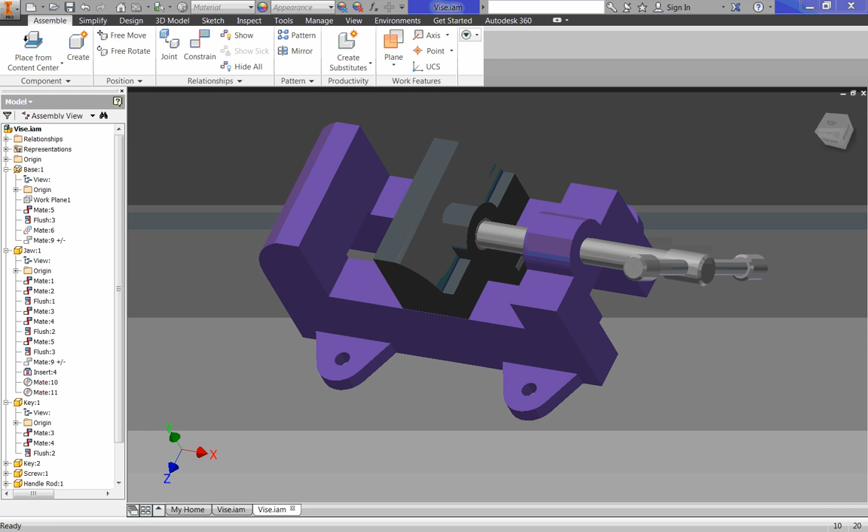Alright, now that we have our keys correctly done, we're going to move on to making it so that this screw can actually fit through this hole. This is going to make a lot of changes from what we originally had. So to do that, we're going to have the screw come all the way through to this side of our jaw.

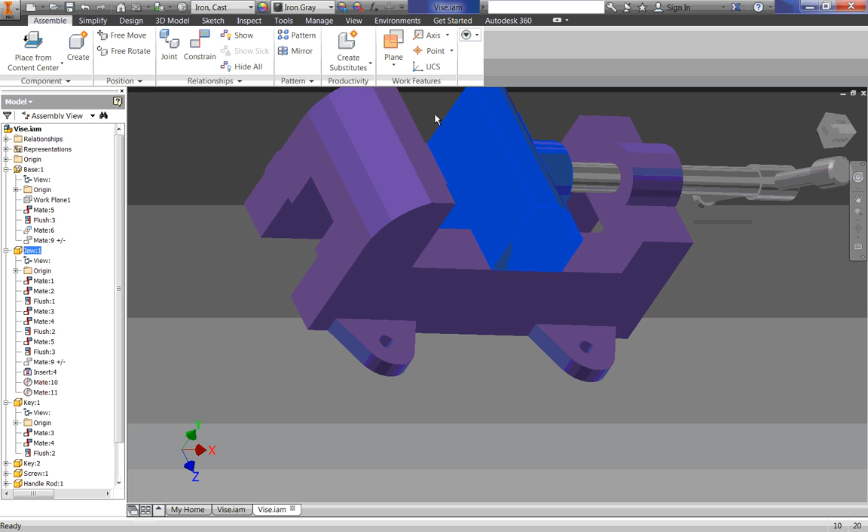And then on that side of the jaw, we're going to have to make it so that the screw can't come back through the hole, but also can't go forward through the hole. So we have a couple different steps here. First off, we need to edit our jaw so that we have a hole coming through, and we're going to also place 2 screw holes there, which you'll see in a little while.

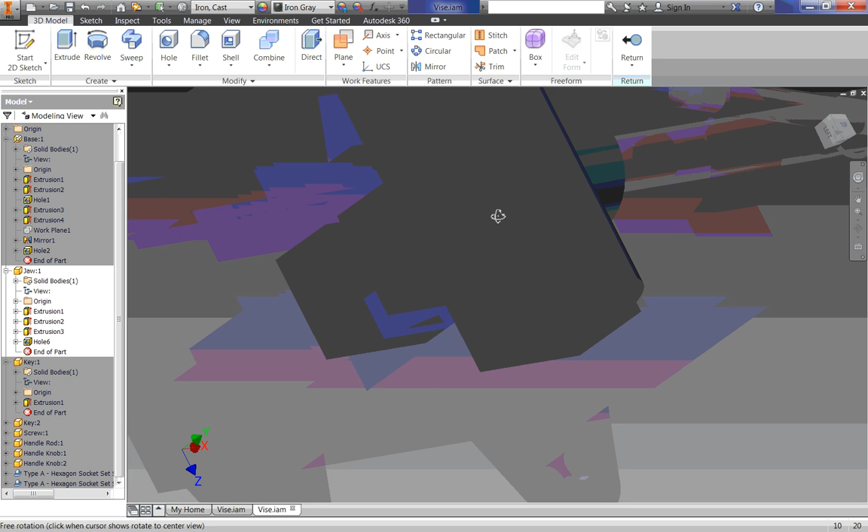So I'm going to double click on my jaw to edit it. And first thing I'm going to do is just delete this hole. I no longer want it. So I'm going to find it in my browser, hole 5, right click, click delete, and there it is. It's gone now. Now we need to place a hole on this side, so we're going to click on hole, click on this side, and I want to center it on the same axis again, so I can just come back here and click on the outline of the circle to center it.

Now, on this side of the screw, we're going to have a special kind of thing called a retaining ring that'll hold the screw in there. So we need to give it room to sit in there. So to do that, we're going to have a counter bored hole. It's essentially a large hole on top of a smaller hole. Now my distance is going to be through all because I want to cut through everything.

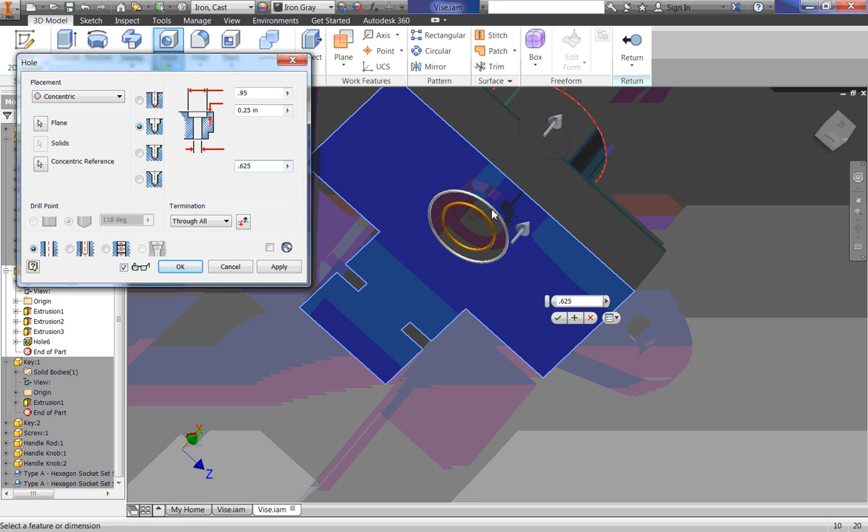We already know the smaller diameter's hole is 0.625. We're going to do a larger diameter of 0.95. And then the depth of 0.25 is perfectly fine. We can just leave that there. So I have a large hole that has a diameter of 0.95 and has a depth of 0.25. And then in the middle of that, I have a smaller hole with a diameter, actually that's supposed to be 0.625, going all the way through it, just as we see here. So I'm going to click OK, and there's my hole.

Now we need to put some screw holes on there, and if we look at my vise with all the changes made to it, that's going to be what mounts these little plates on it. So if I hide these, you can see those screws go into holes right there. So we're going to then go ahead and add those. So I'm going to create a sketch on this surface.

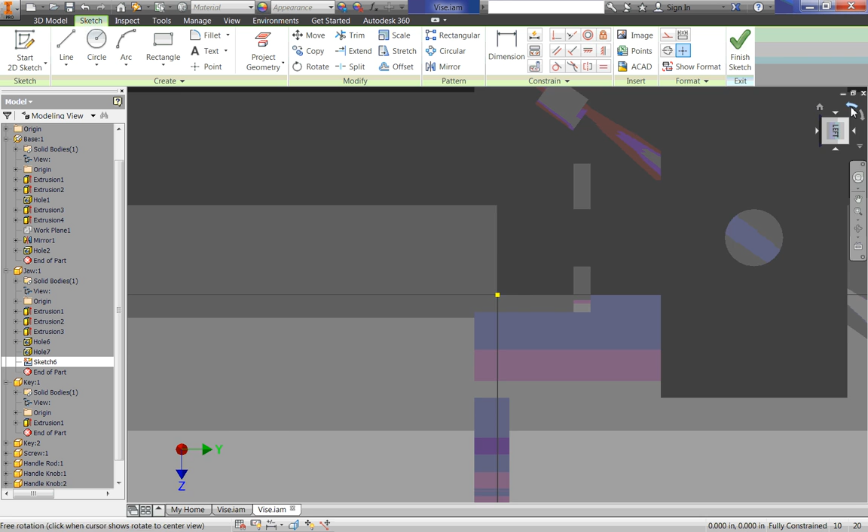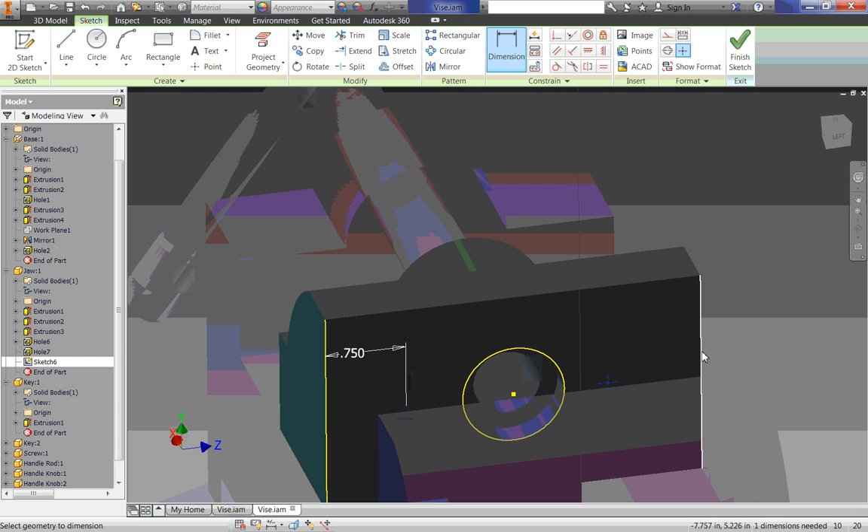And I'm going to just put 2 points there. Doesn't really matter where. And I want to make them in the same plane as the center of the circle. So I'm going to go up here and click Project Geometry, and click on that outer circle to get that center point. Then I could just use a horizontal constraint and make them both horizontal to that point. Then I'm going to do a dimension from the point to the edges, and I'm going to make this 0.75 inches. There we go.

So I'm going to click H on my keyboard to get to the hole tool. I no longer want a counter bore hole. I want this to just be a regular tapped hole. So I'm going to change my distance and then go down here and click my tapped hole. Now earlier we had a full depth tapped hole. We're not going to have that anymore. That's a much more complex thing to do in manufacturing. So typically we have a longer hole that isn't tapped than the regular depth of the hole.

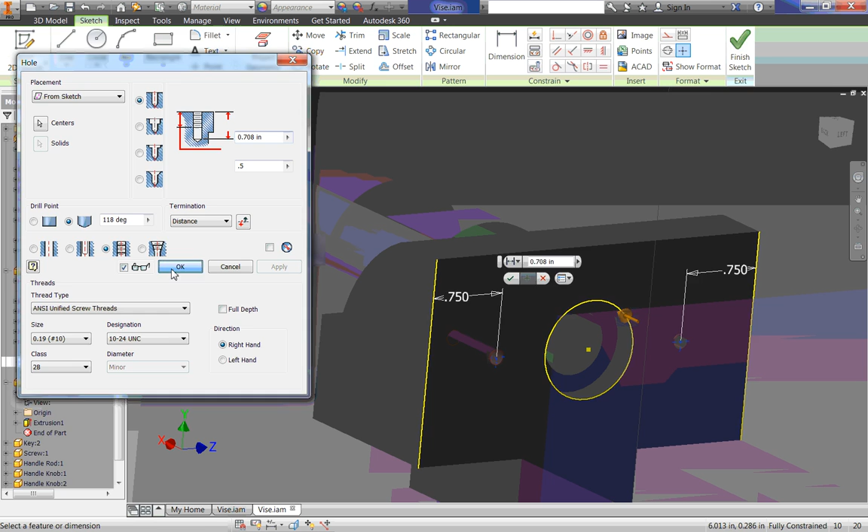Now we're going to change our size. We're going to just use a number 10 screw here. It's a fairly small yet strong enough screw for what we need. And we want our thread distance to be 0.5 inches, which will automatically set a good amount of hole distance past that. So I can click OK, and there are my holes. And if we look really carefully, we can even see the thread stops at some point, and there's the rest of the hole. Okay, so this is all we need to do to this part. So I'm going to click Return.

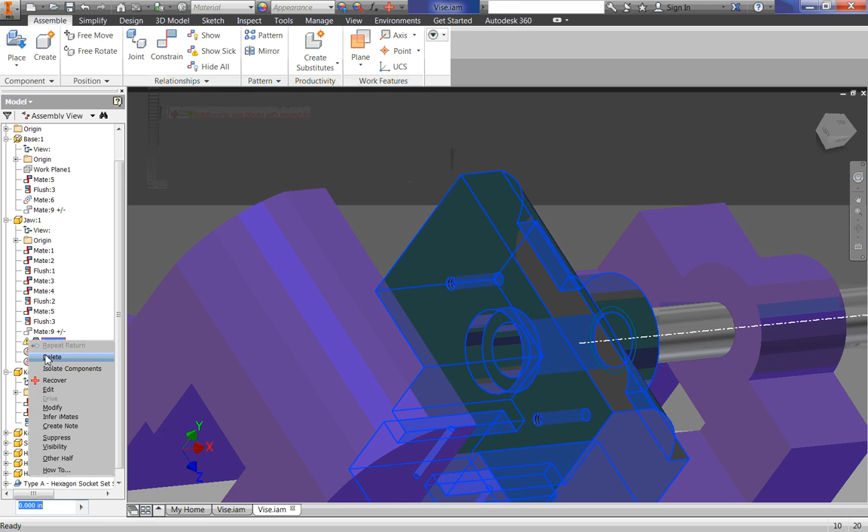And we have this error because that constraint we had with the screw going into the jaw no longer exists. So I'm going to just click accept and then find it. It's the one with a little error message, and I'm going to right click on it and delete it. We don't need it anymore.

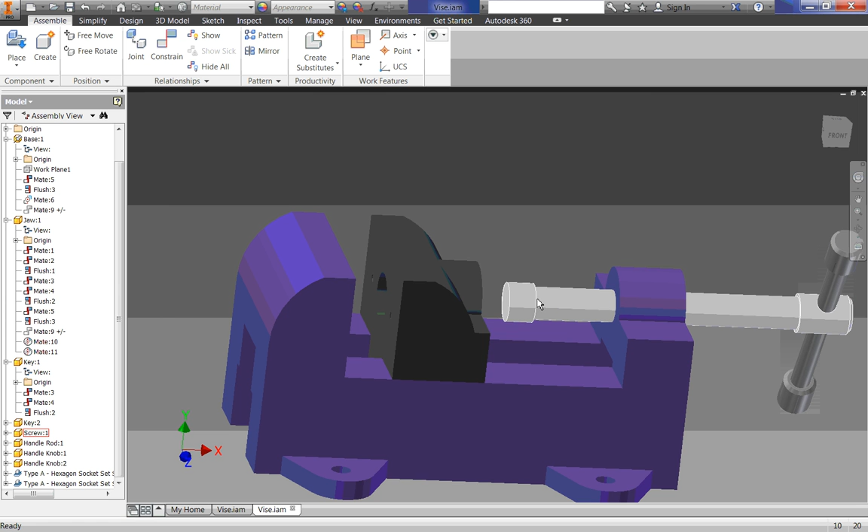Alright, so now we need to make our screw so that it fits all the way through that hole to our side. And to do that, I'm going to need to add some distance onto it. So I'm going to measure by clicking M on my keyboard to get to the measure tool. And I just want to measure from here to here, figure out how much longer I need to extend my screw. So I need my screw to be 1.75 inches longer from this inner part here.

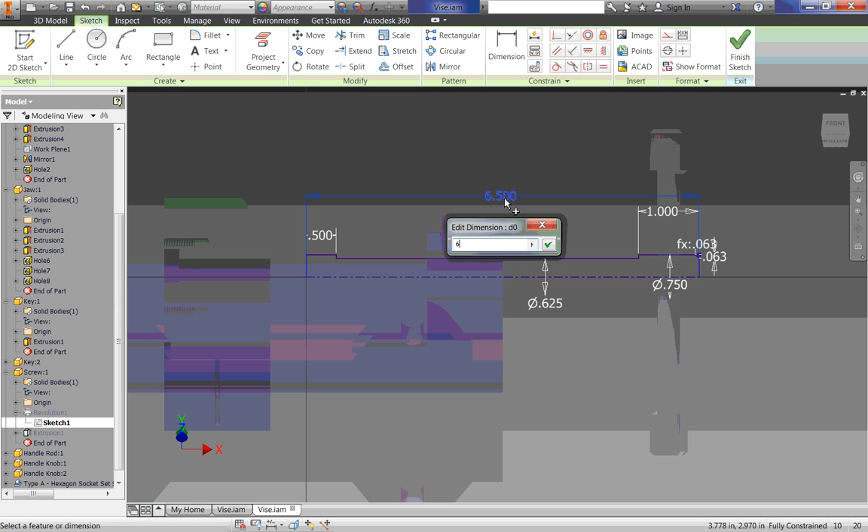So I'm going to double click on my screw to edit it. And I'm going to go edit that revolution by clicking the plus next to revolution and double clicking on the sketch. So first thing I'm going to do before I forget is extend that distance by 1.75. Now this 0.5 here we're going to get rid of later, but I only really want my screw part to be 1.75 longer, so I need to subtract it from that 0.5 there. So this will be 6.5 plus 1.25 inches will give me my total distance that I need.

Now I'm going to go ahead and delete this 0.5. I'm going to zoom in and delete these lines here. I don't need them anymore. Now I can't select this line because it's only letting me select the dimension line, but I need to delete that line. So I'm going to right click and go down here and click select other. And that allows me to select anything that I'm near. And I want to select the curve, which is really just a straight line, and delete that by pressing delete on my keyboard.

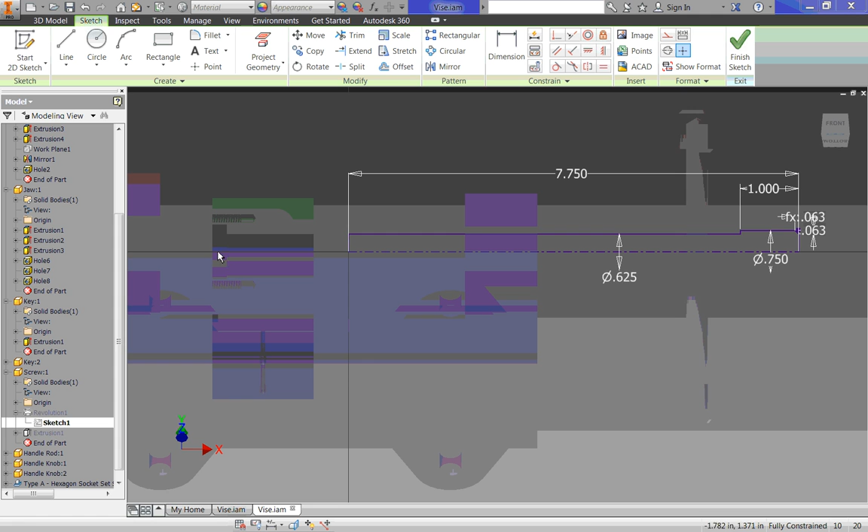Now I can just drag this line forward, and it can go further than it needs to go. It doesn't really matter. And then I draw a line from my origin up until I intersect. And then I'm going to just go to trim and trim away that line. And now we just have a straight flat area. Now, we're not done though, because we're going to use something called a retaining ring to go and lock that shaft in there.

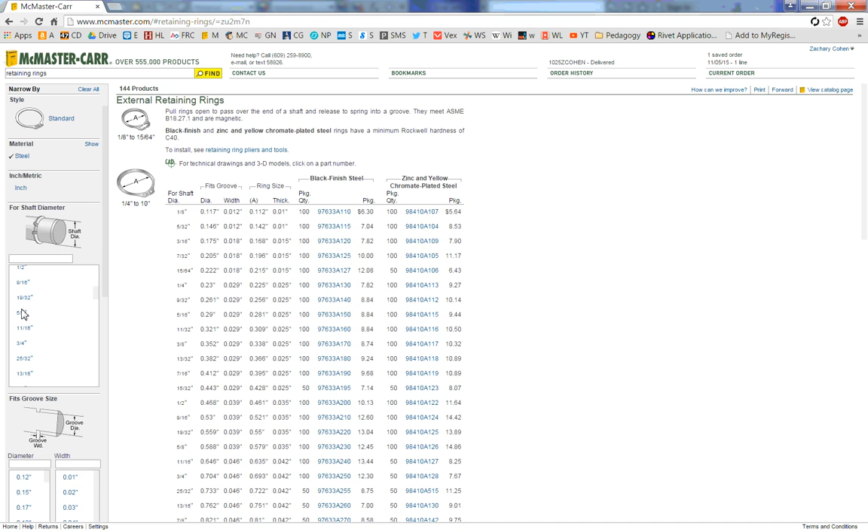So if I go to McMaster, I have an option here called retaining rings. And there's all kinds of different options, and we're going to go with an external retaining ring here. Now, I can narrow down what I need, so I don't need it in stainless steel, so I can select steel. And then we know our shaft diameter is 5/8 of an inch. So I select 5/8 of an inch. And it gives me two options, black finished or zinc and yellow chromate. We're going to just go with black finished. And if I click on that, not only can I buy it, but I can click on product detail. And it'll give me this whole CAD and drawing of everything I need to know about it.

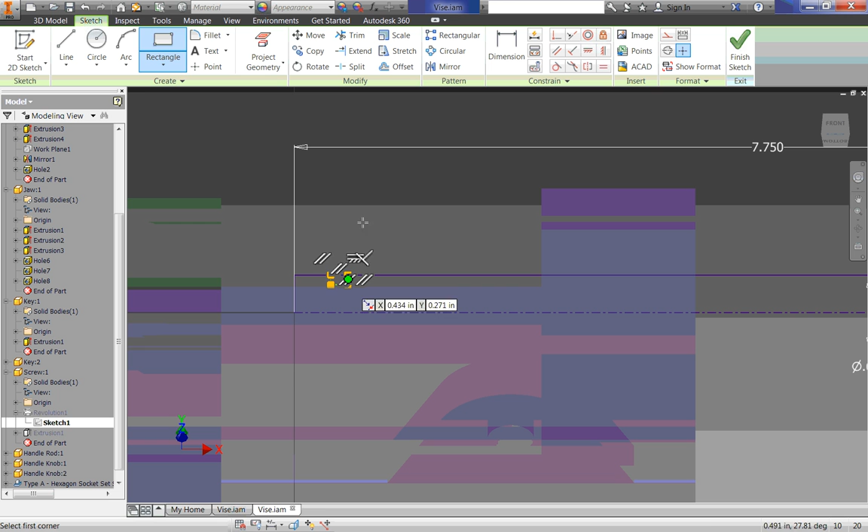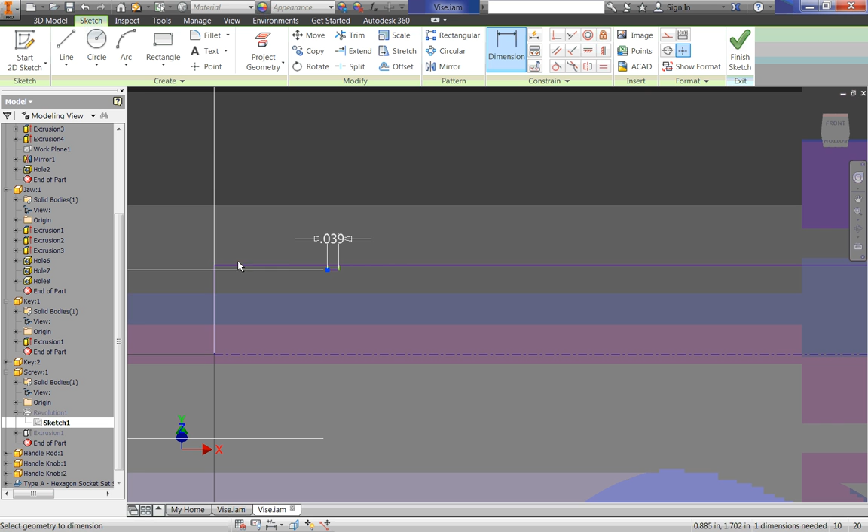So to do that, I'm going to just draw a rectangle, doesn't really matter where, and then go ahead and dimension it. So we saw the diameter of it was 0.588, it's a pretty small groove, and then the width of it was 0.039 inches. And it still has a green line because I can still make it move back and forth. I'm going to place it 0.125 inches away from the front. So now I have a box that we can cut out to create our groove. So I'm going to finish sketch.

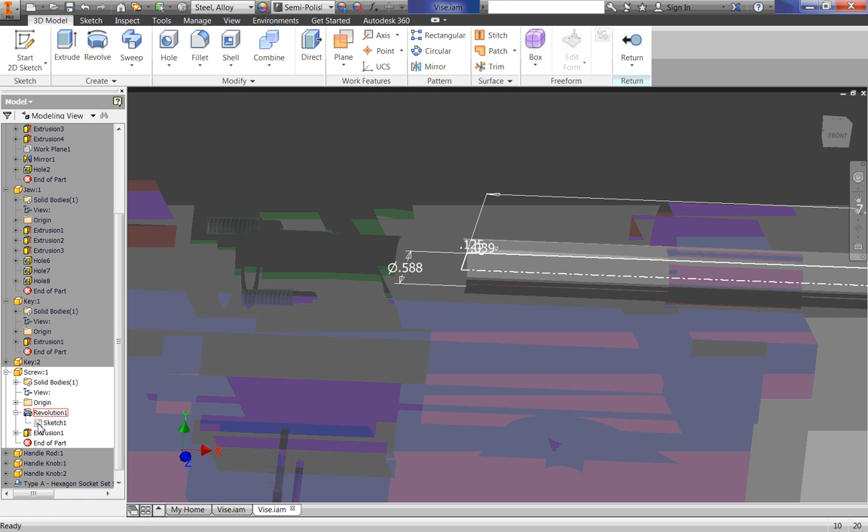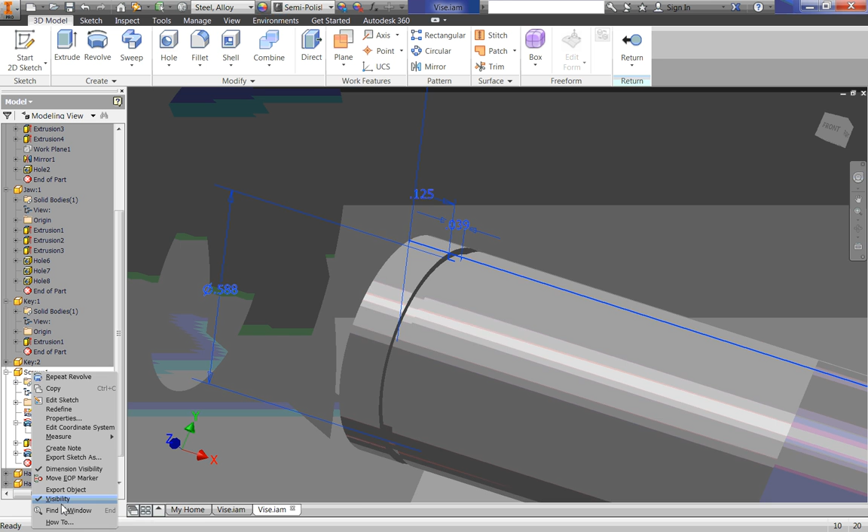Now that groove doesn't show up because I need to revolve it. And the easiest way to do that, I could add to this revolution, or I could just make another revolution. So I need to first see this sketch, so I'm going to right click on the sketch and click show sketch. And then I go to revolve, and I can select that box that I want to cut away. So I click cut in my options, and then I need to pick the center axis. Click OK, and there's our cutout. Then I'm going to just right click on the sketch again and uncheck visibility so that we no longer see it. And there we have our groove.

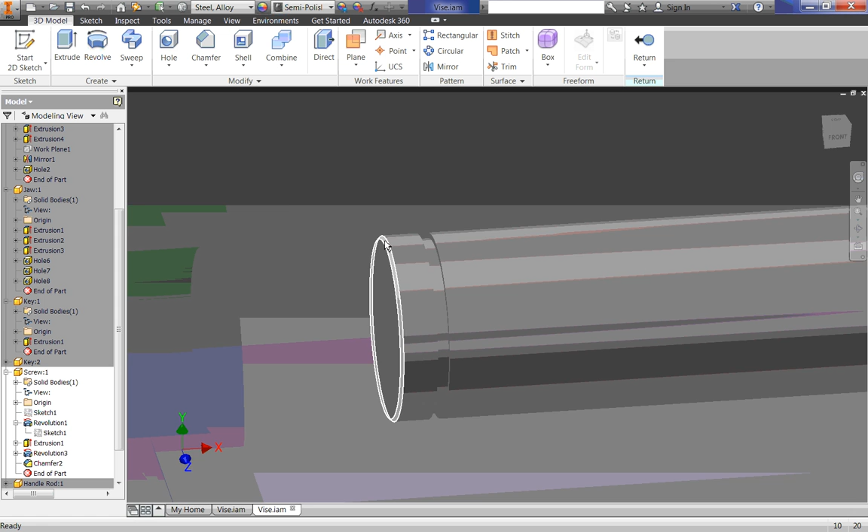Last thing I want to do to this is I want to chamfer it. So it's a sharp edge right now. And I want the distance to be 0.05 inches, or sorry, 0.01 inches. It's a fairly small chamfer. It's really just a safety feature, so we don't have a sharp edge there to cut someone. So I click return, and now I have a chamfered edge on there.

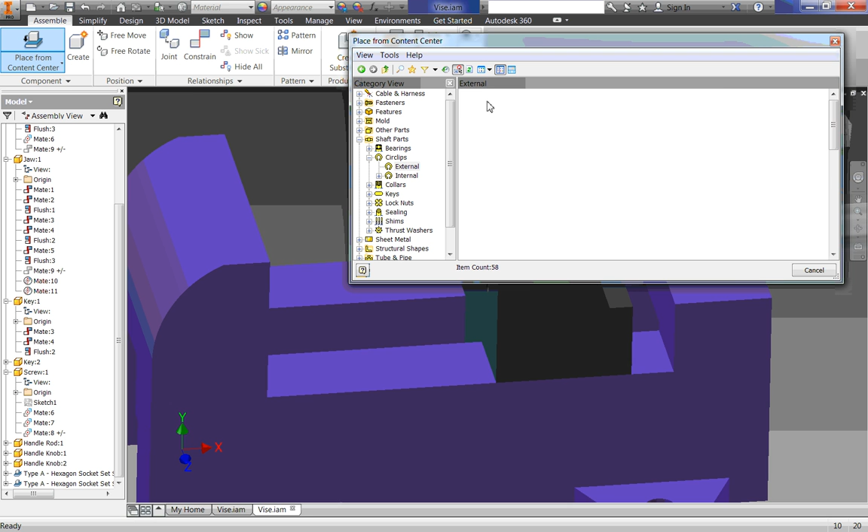So I need to place that retaining ring, and just like we did the set screws earlier, I can place that from the Content Center and have Inventor create it for me. So that's under shaft parts. I have all these different options, including a circlip, which is also a retaining ring. I want an external one. And this very first one is exactly what we need, an ANSI B 27.7M. So double click on it.

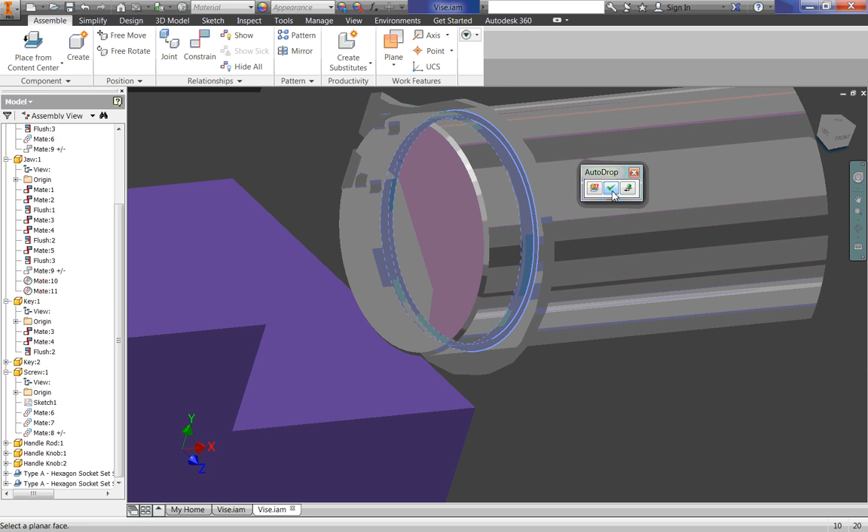And I'm first going to select the cylinder, so that little groove that we drew. And then I'm going to select the back edge to place it on, and click the little check mark, and there's a retaining ring. Now I don't need to place another one, so I'm going to just press escape on my keyboard, and we have a retaining ring in there then.

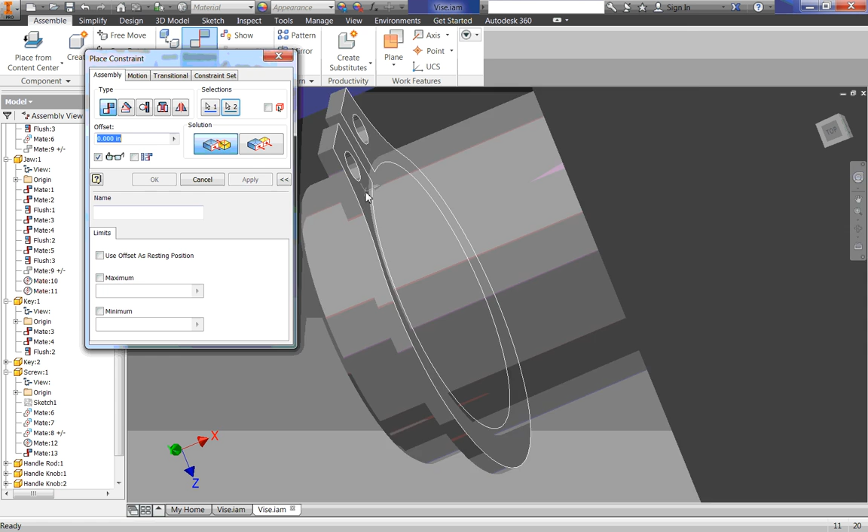Now this retaining ring will sit flush back against this wall, so I'm then going to constrain that. So I'm going to go to constrain, go from that wall to this side of the retaining ring. And it's just going to sit in there freely.

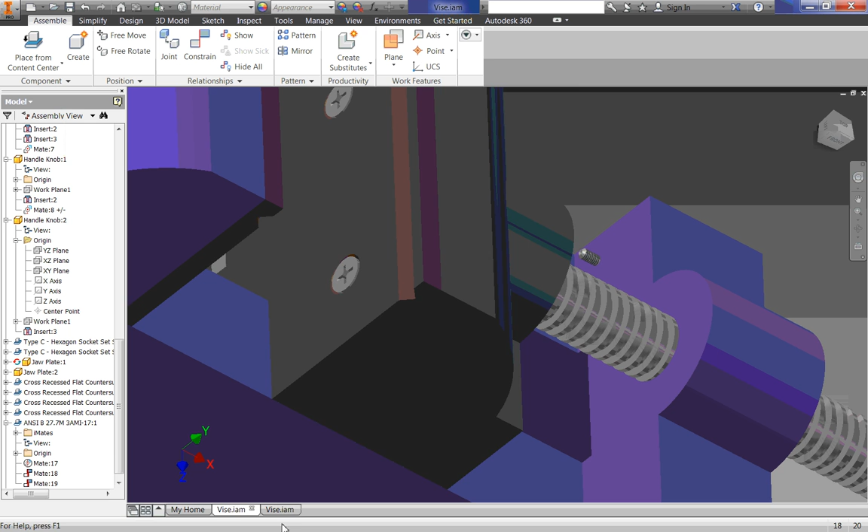So now, when my screw pulls back, it'll pull my jaw with it, but I still have nothing to keep my screw from just going forward if I were to make this in real life. And that's what these holes are going to be for. Remember, we have these little plates. Not only are they sacrificial in that I can drill in them and it won't really matter if I damage them, but also they're going to be the wall that keeps it so that when I push forward, it'll also push the jaw forward as well. So that means I need to create a new part.

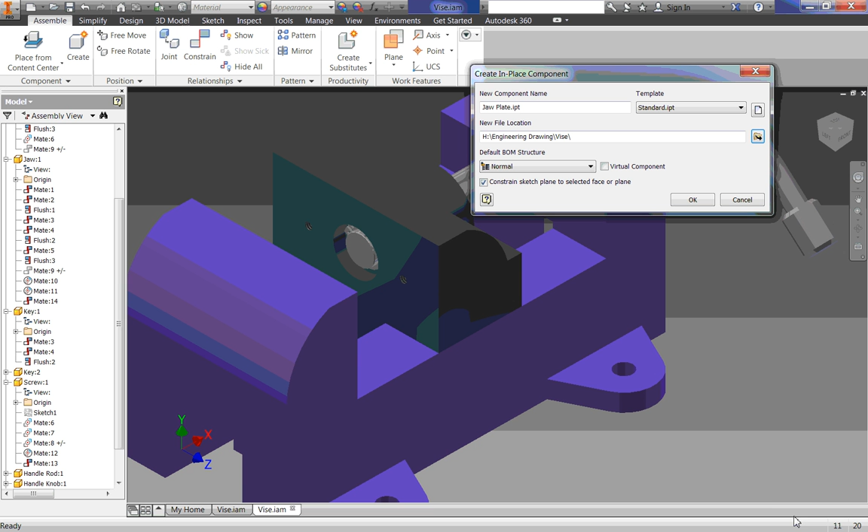And one of the cool things about assemblies is I can create the part within the assembly mode. So if I go up here and click create, it allows me to name the part. So this is going to be, what did I name it earlier? We'll just name it jaw plate. And I need to select a location to save it in. So that's going to be in our H drives, our engineering drawing folder, our Vise folder. Right here is perfectly fine. And click OK. And now I have a part created.

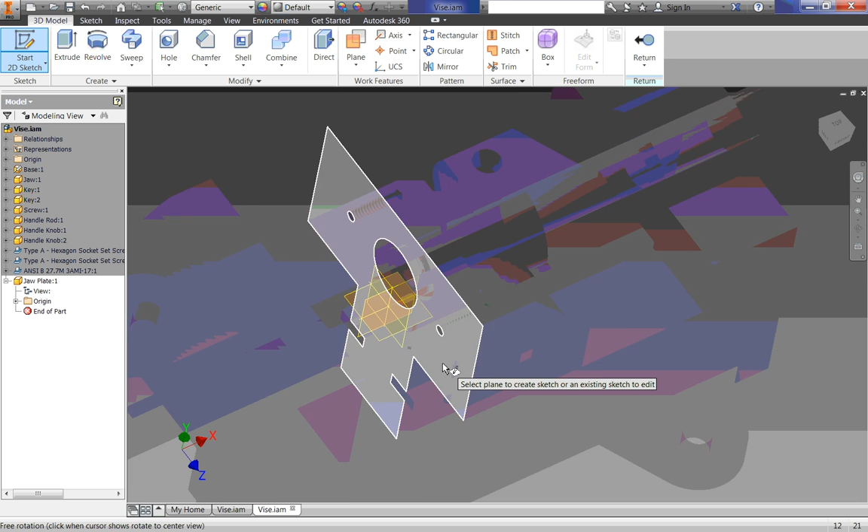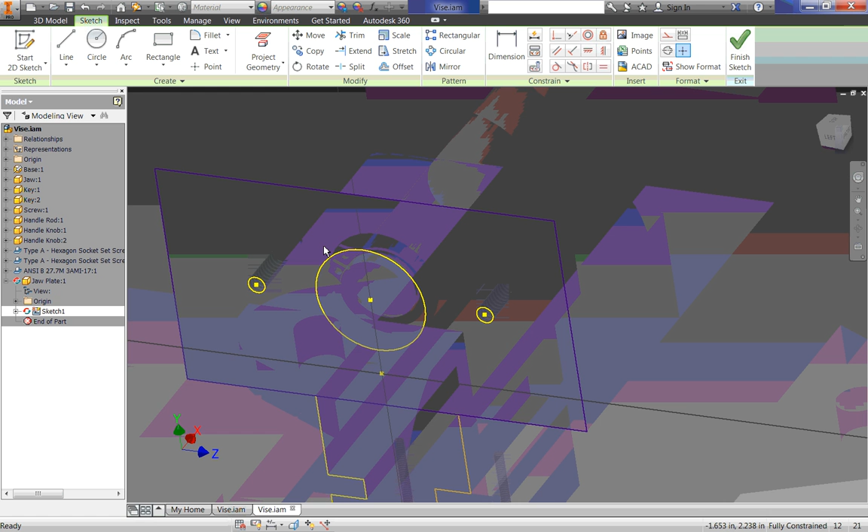So I need to select what surface I want to start that part on. I'm going to start on this face here. And we can start drawing a sketch. So I'm going to go to Start 2D Sketch. And we want to start on our front plane, our XY plane here. Now I'm essentially just going to make a square from here to the other side of the jaw. So to do that, I'm going to project the geometry of the jaw. So there we have our square essentially. Then I can use the rectangle tool to make it. And there we go. That's all I need so far.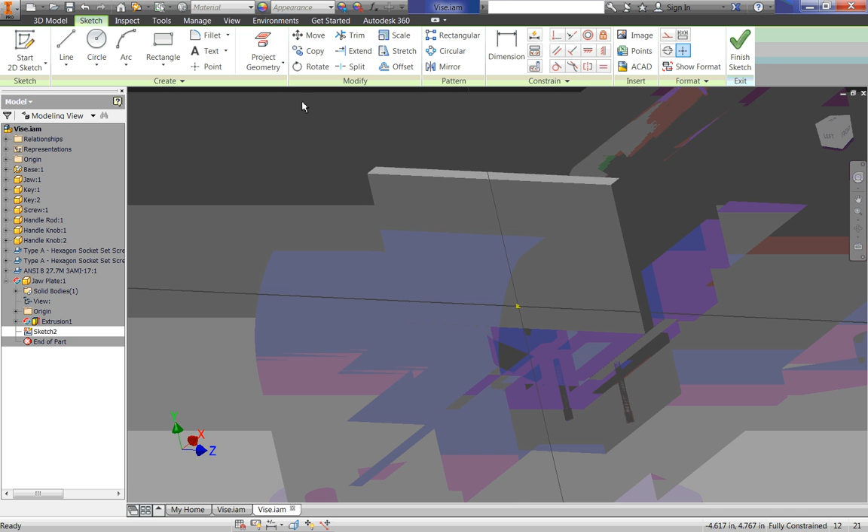So I'm going to extrude that out. And I want to extrude every part of it, so I'm going to select the circles too. And I'm going to change my distance to be 0.2 inches then. Then we just have to add those holes for the bolts here. So I'm going to create a new sketch on that front surface. And I need to then, again, project the geometry of that back surface. The easy way to select it is select the lower part of it down here. Oh, there we go. And now I have the holes where I can make my points.

So I'm going to go to Hole Tool. And this is going to be a little different. We want these screws to sit totally flush with these jaw plates. So I'm going to select a countersunk hole, which has a little V cut out of it. And then also, we don't want these things to be threaded. We actually want what's called a clearance hole. And that allows the bolt to easily go through it. So I'm going to select clearance hole.

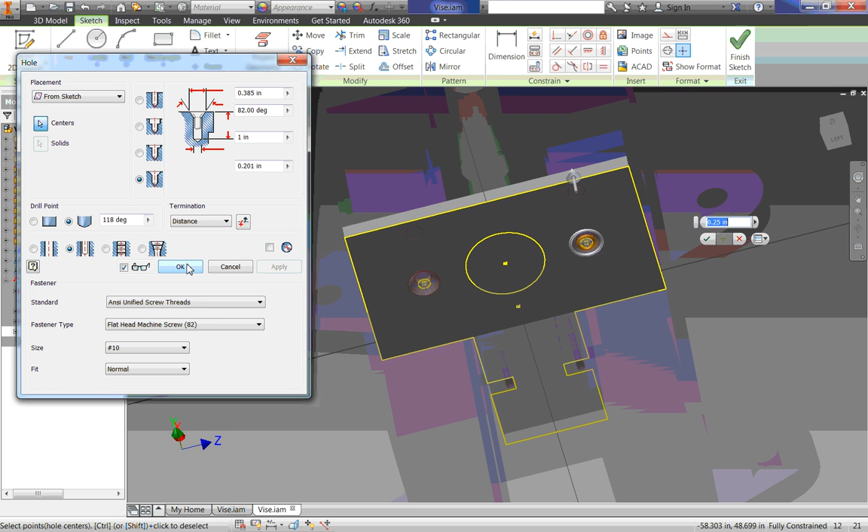And then I'm going to go down here to size. And we earlier selected the number 10 thread. So I'm going to select the number 10. And that automatically makes every distance up here what we want it to be. So a number 10 thread or bolt uses a .201 diameter clearance hole. It doesn't really matter how deep it is because we're just going to 0.2 inches thick. And then these two things are automatically set for number 10 as well, so that's exactly what I need. So I just click OK, and there are my holes. Easy enough.

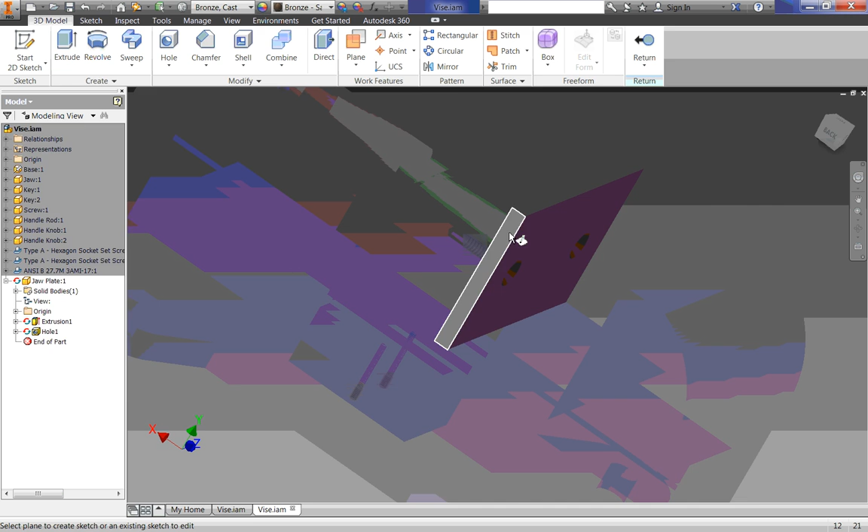Let's change our material. These are often made in bronze. It's a soft material that won't damage something else. And then the last thing I want to do to this is, if you look at this version, I have a little V cut out here, and that's so that we can clamp pieces of metal in it. So I'm going to create a sketch on the side, and I'm going to project that geometry so I can see exactly what I'm doing. So I have a yellow line outlining everything. I'm going to just draw the little V shape then.

I want to make sure these lines are perpendicular to each other. So I'm going to come up to my constraints, select a perpendicular constraint, and go from one to the other. Apparently I already made them perpendicular when I drew them, so that's good. So then we can go ahead and dimension them. I want from one end to the other to be 0.2 inches.

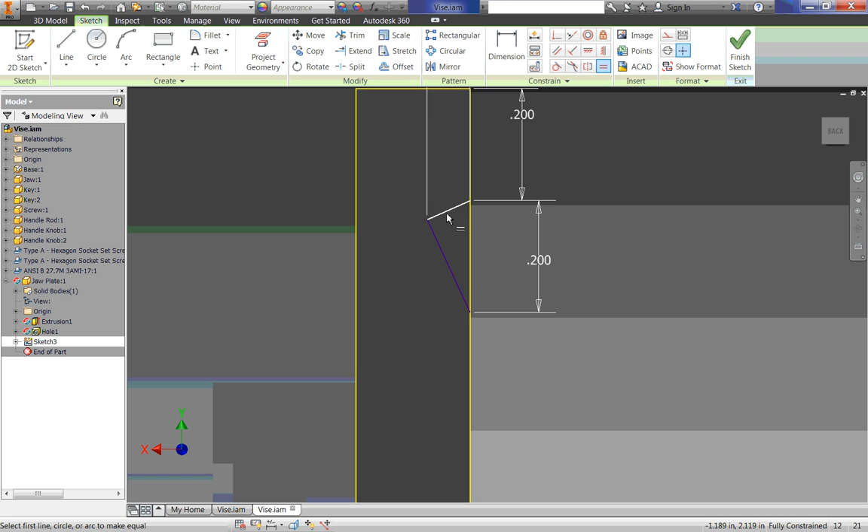From the top to the bottom, or from the very top, I want it to also be 0.2 inches. And then I want it to be 0.075 inches deep. Now we can see the lines got screwed up here. I can fix that by just making them parallel to each other, or equal to each other, and that didn't work. So let's figure out why.

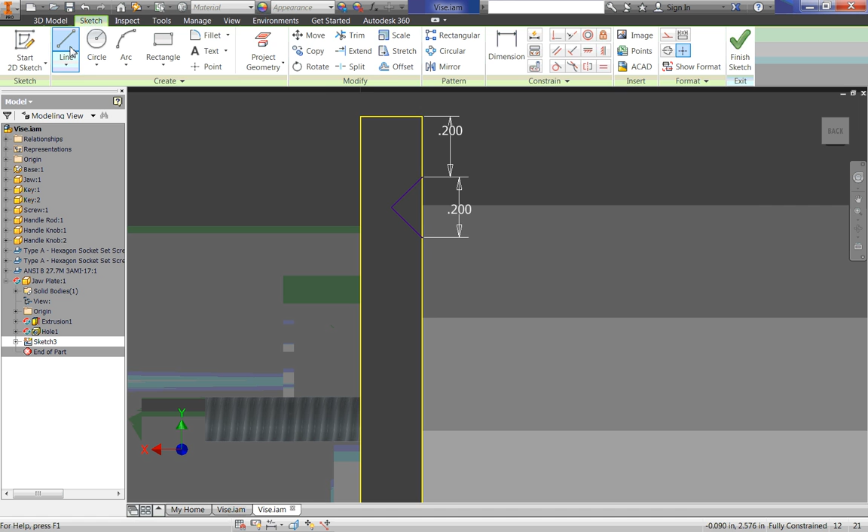We're trying to make them equal first. There we go. Oh, and if these are 90 degrees, I won't be able to set a depth just due to math. If this is 0.2 inches and this is exactly 90 degrees, it'll essentially use trig to find that line there. And that's all we need.

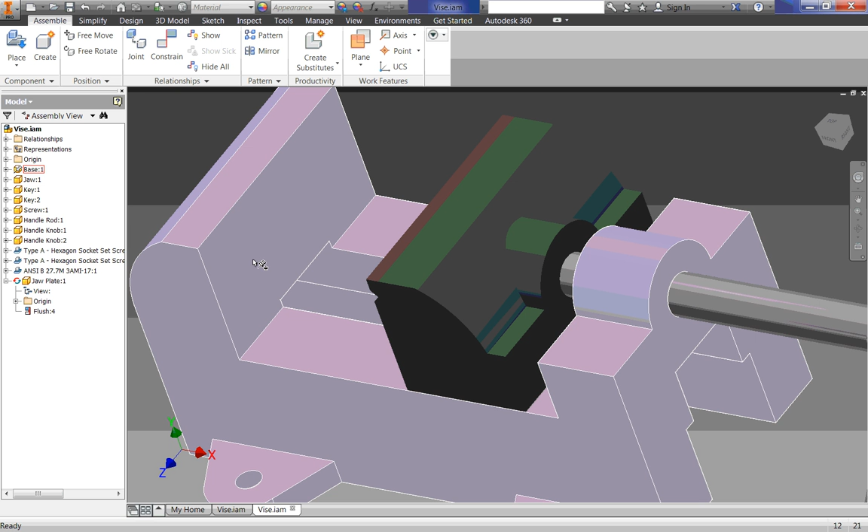So let's extrude that then. I'm going to just select that and go to cut, and I want my distance to be all. And there we go, it cuts it all the way through. So let's click return. And you can see that part is now made there.

Now we need to place another one on this side. And to do that, I first have to place those holes that we did earlier on our jaw. So I'm going to double click on my base, and I'm going to create a sketch on that surface.

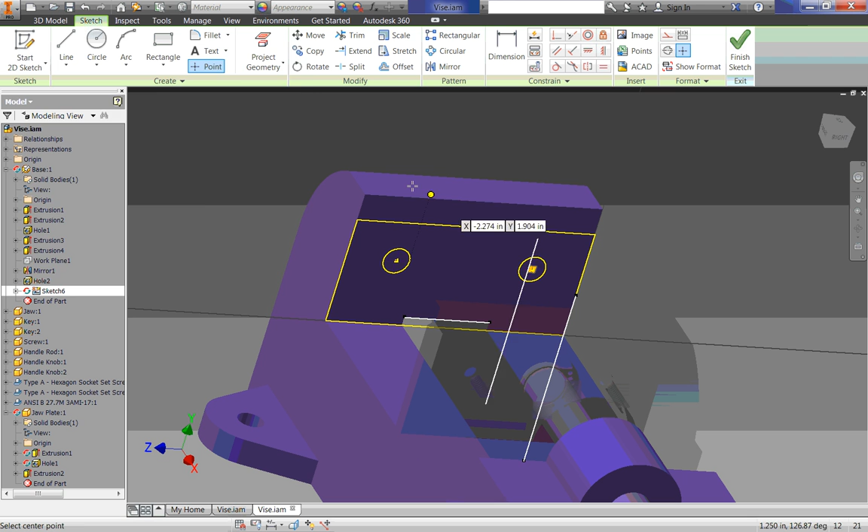Now I want to make sure those holes line up exactly with this side. So I'm just going to go ahead and use my project tool and project those points to it. Select point tool and select the center points. And now I can click on the hole tool and do 2 number 10 holes

that are 0.5 inches deep for the thread. And that's all I need to do. So I click OK, and there's those holes. So we click return, and then I need to place another jaw plate.

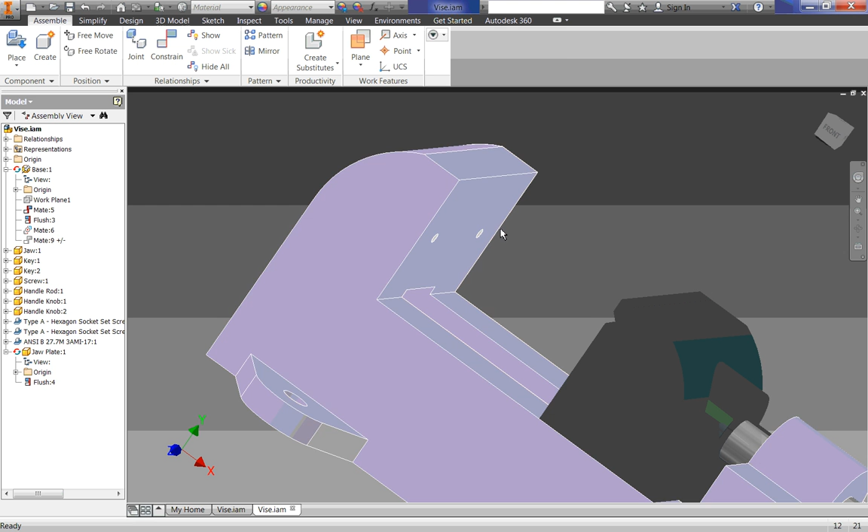Because we made it, I can click on place up here. And let's go back. Oh, and before we can actually place it, I need to just save my parts, and I'll save my jaw plate. So this menu that comes up essentially is saying, do you want to save these files that were changed?

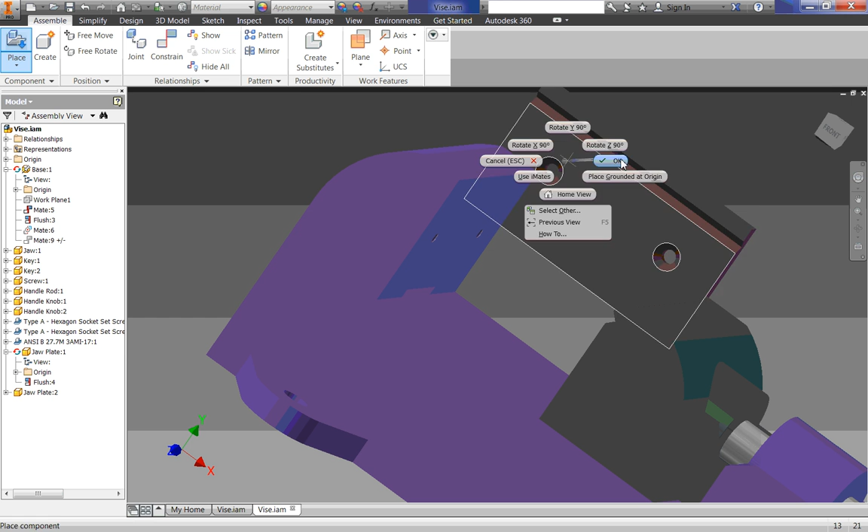And initial save means I'm creating the jaw plate to begin with, so I'm going to click OK. That'll save all of them and create the jaw plate file. Then I can click place, and there's my jaw plate. So I'm going to place one, click OK, and then let's go ahead and constrain it.

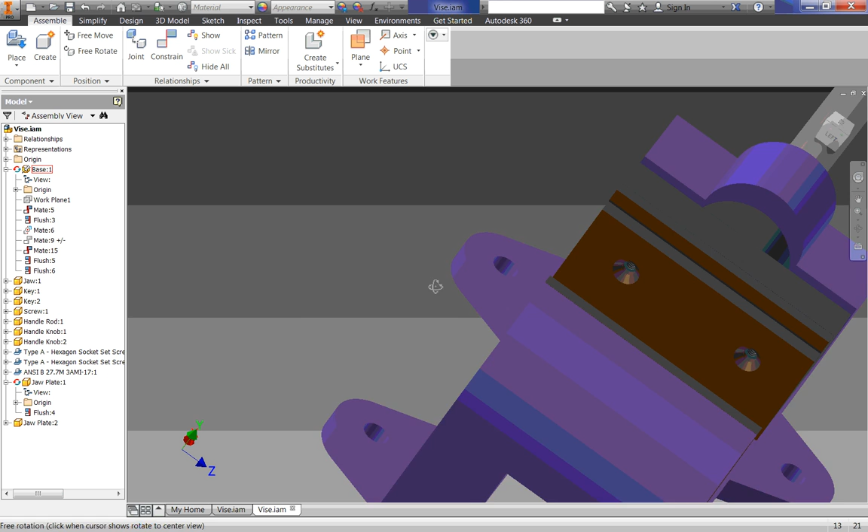So I'm doing this part quickly because by now you should be able to make these simple constraints so that that locks in there.

So now, once we place the hardware in there, when I move this, the screw will either butt up against my jaw plate and make it move forward, or pull up against the retaining ring and make it pull backwards.

So let's go ahead and place those screws. And again, I'm going to have Inventor do it for me by clicking on place and clicking place from Content Center. We're going to go back to fasteners, and this would be in a bolt. And I want a countersunk bolt, and it gives me a ton of options. I'm going to scroll down

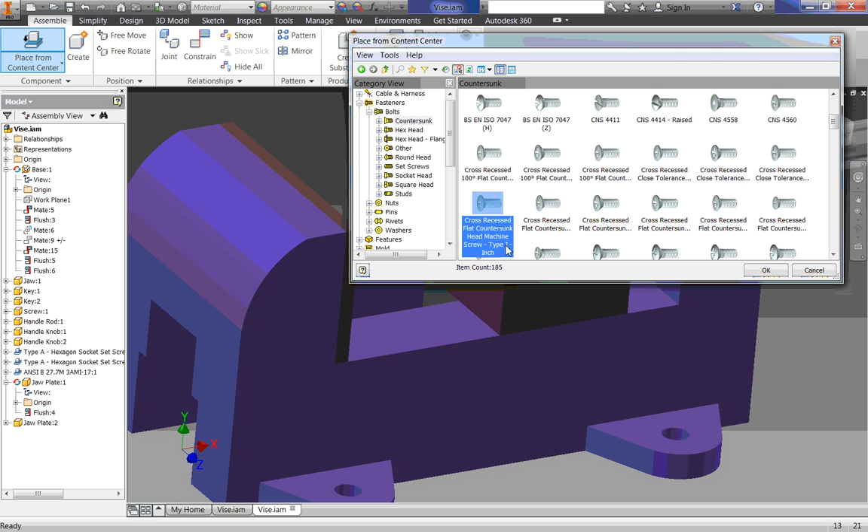and select a, where is it? A cross-recessed flat countersunk head machine screw, Type I - Inch. So double click on it, and it's now going to ask me to select a hollow cone to place it in.

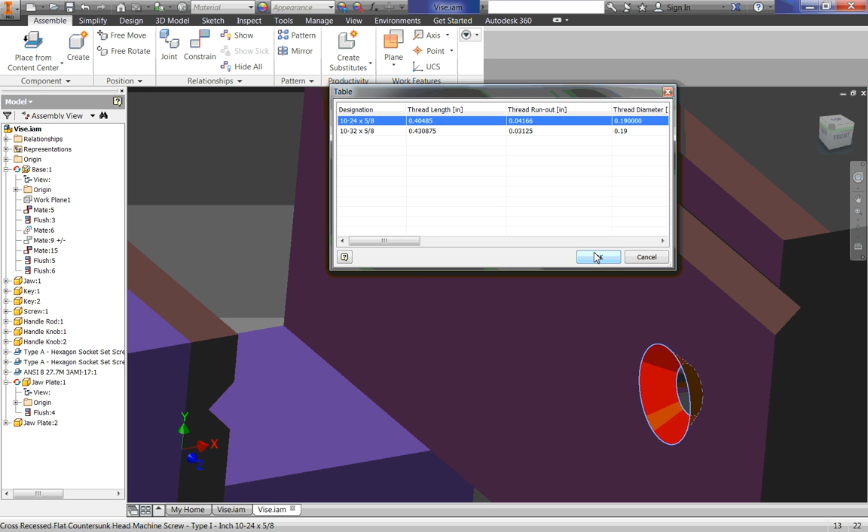And then we can change the length of it. We want it to be 5/8 of an inch long, that would be perfect. That'll give us enough bite into our jaw. Click OK, and click OK again.

And there's our screws, so we can do it on the other side now. It keeps everything the same because it assumes you want to use the same tool. So I just clicked on one of my surfaces and then click apply, and there's those screws.

And there we have it. This now goes in and out perfectly, and that will actually stay there if we made it in real life.

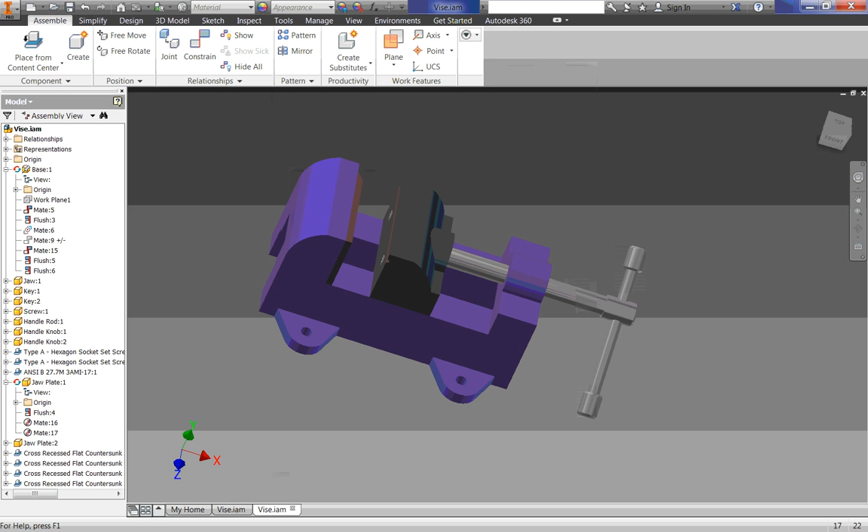So let's go ahead and check our mass. So your updated mass should now be 17.937 pounds. Let's save it. And we are done then.